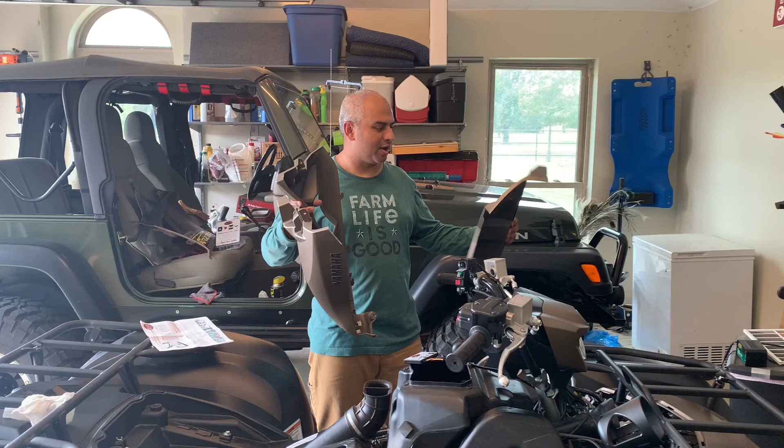This is about installing the EHS fuel tuner and AIS delete on a 2020 Grizzly XTR. I already removed all these things and have the tuner installed, but I just wanted to do a quick video on what I did.

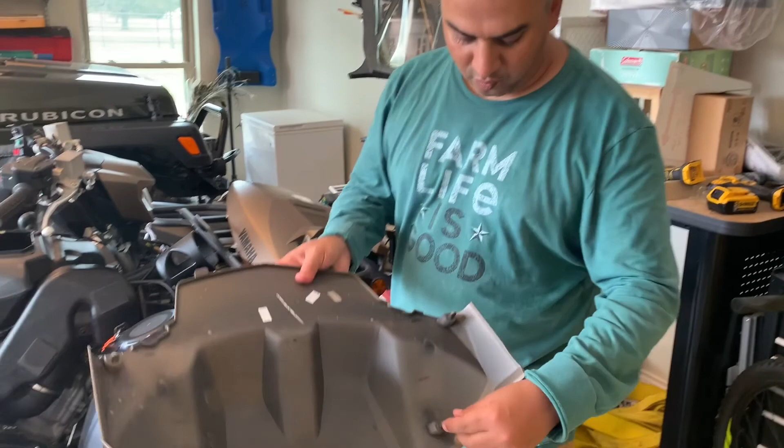Over here, this is the battery cover. This needs to come off first. Then this thing over the airbox and all that needs to come off too. It's just held with 4 tabs, so you put your fingers in it and pull it up, pop it up. Pretty easy stuff, don't have to overthink it.

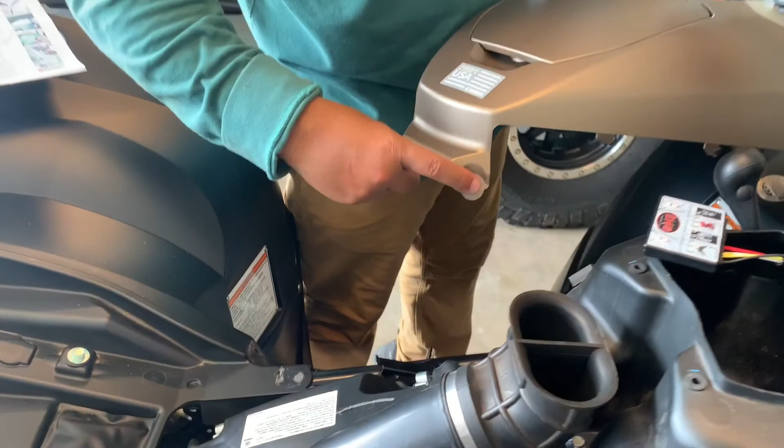This thing has 2 bolts over here that go right here, and 1 bolt right here. So you do that, then you have 2 things that pop in over here, that's over the side covers. They are just clips like this that you have to pop and take out.

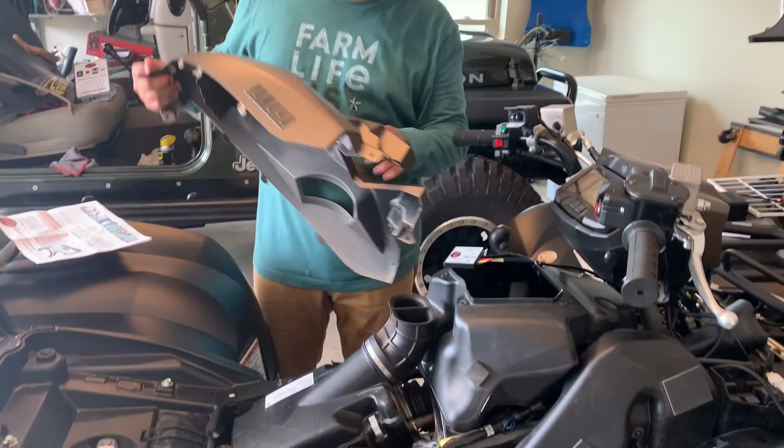This thing comes out, just leave it in park. I've heard videos that say move it to neutral, but not necessarily. Leave it in park and just wiggle this slowly out of here.

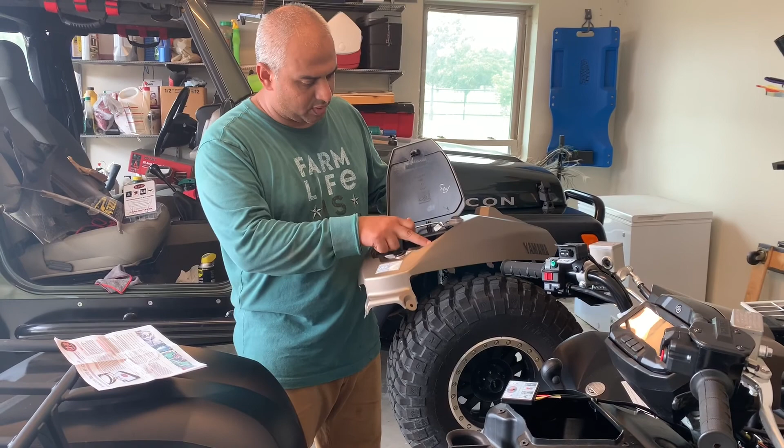When you do that, there are four screws over here. Remove those screws, they go over here in the storage box, and over here you see that nut. I lost one of these nuts, it fell off inside the engine, and it took me several hours to find it. So try not to drop that thing. Those are the 4 screws that you remove.

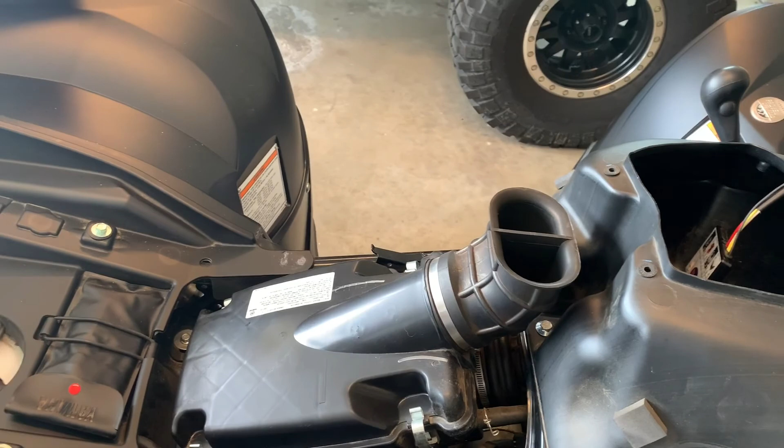You need to remove the airbox lid to get to the bolt over here to remove this thing out of the way. So I'm going to quickly show you how to remove that.

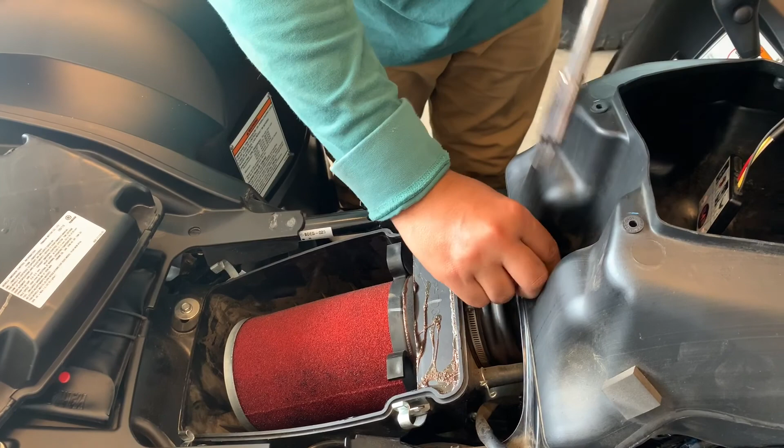Move that out of the way, move that, then just pull it gently and this thing comes off. The way it's connected, you get 2 connections over here. This was the original connection going into the injector.

So you take this connector, just disconnect the gray connector, pressing the tab right here and it comes off. Put the EHS tuner gray connector here, and the black connector that comes from the EHS tuner into the gray connector from the factory. That's how it's connected.

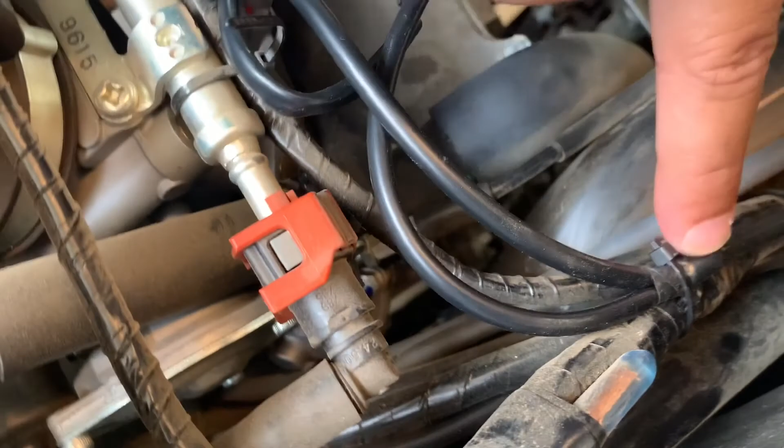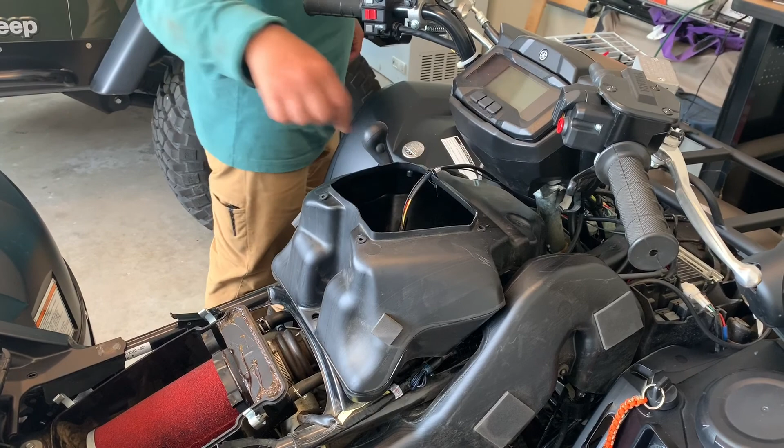You see that's how I routed the wires for the connector right there. That was kind of a little predicament for me as to how and where the wire goes without binding, so I wanted to show you guys that. Most of the videos, nobody shows how to route the wires. So the way I'm routing them, I don't know if it's perfect or not.

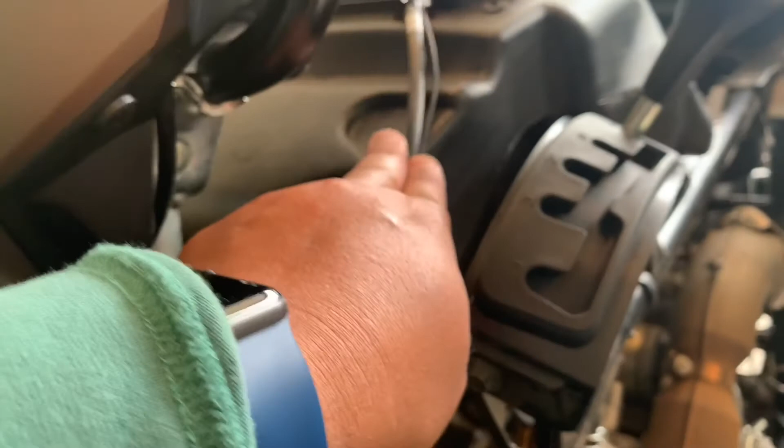Basically, I'm routing them over here away from the steering, protected from it so it doesn't bind. I left it loose, then just go around it, and the cover will sit on it. That's how I've wired my EHS tuner. Right now it's just hanging over here, and I'm going to stick it up on the lid once I put the lid on.

Put the bolt back on for the lid, for the storage box. This thing's hanging over here fairly loose so it doesn't bind anywhere. Put the lid back on, you need to take the lid off to reach this. Make sure the gasket is proper.

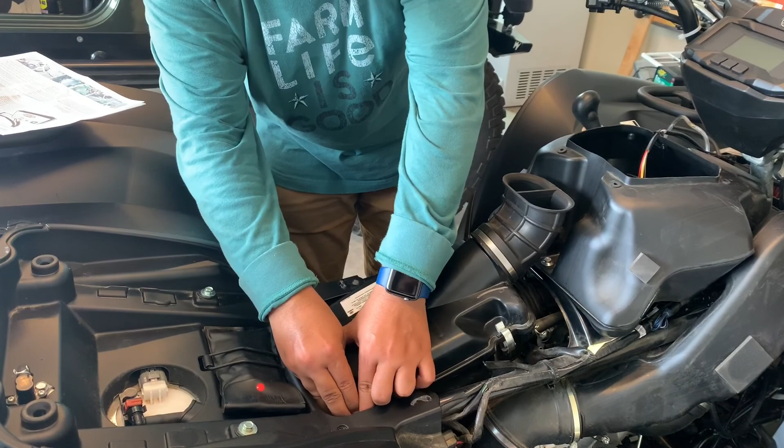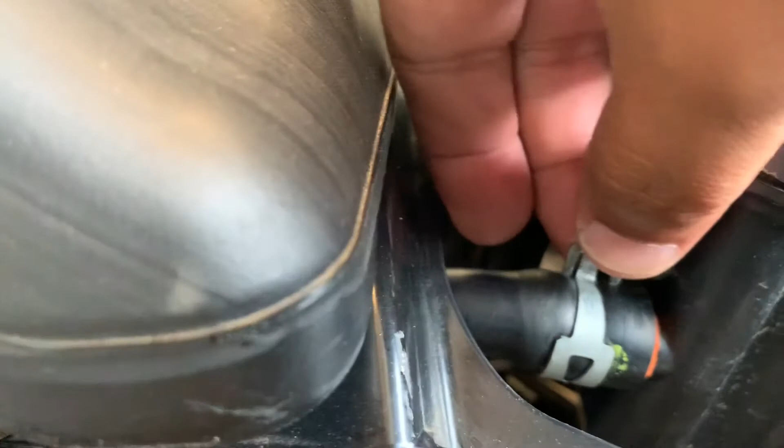This is the AIS delete, the air induction system. That's where it pulls air into the exhaust to burn off the remainder of fuel, any extra fuel for emission purposes. It makes the machine run a little hotter, and on some of the older machines it's had the popping issue, so most people on the forums say to block it off.

So I just put a bypass rubber blocker over here and put the hose on it. It was kind of hard to put on, so I used lots of WD-40, and you can see that this clamp is kind of maxed out. That clamp was hard to get on, but I didn't want to run to the store to get another clamp, so I somehow got it on and it's all good now. It's not going to budge, hopefully we never have to mess with it, so it's all good.

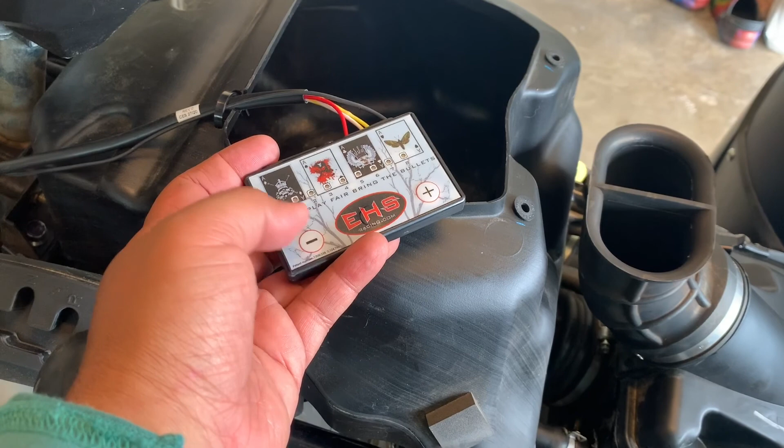So we're gonna start the machine and show you exactly how the programming works. The reason I did this EHS controller is not to get more power or anything like that, but to really make the machine run cooler. From the factory it comes pretty lean, and if you get on it, it basically gets the machine running pretty hot.

So everything I read suggests we need to add a little bit more fuel, and by adding more fuel it runs cooler. Let's see what it does. I don't know how much cooler it's going to run in Texas heat, but we'll try.

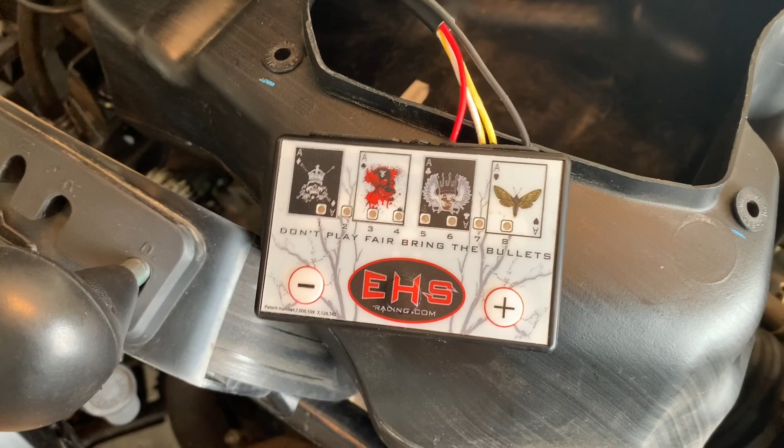Quick rundown on the EHS controller. So once we start this thing, it cycles like that. That just shows us it was installed properly.

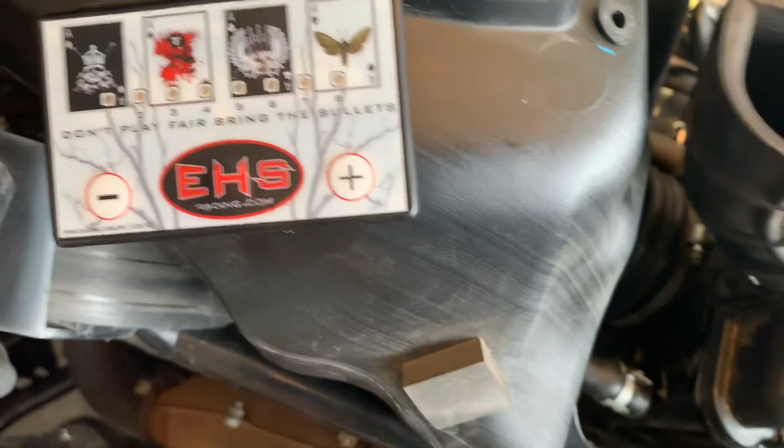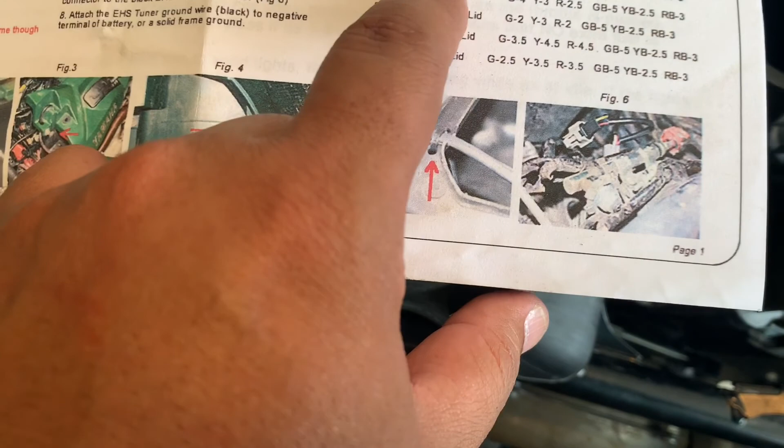And what it does is it gives you a set of instructions, and the instructions say we need to pick the setting which is best. Since we did not do any of the mods, the mod we need to do is the stock mod with or without tip. Well, we don't have a tip, so regardless we're going to do that mod right there.

This is the first one. So we have to make sure that green is 3.5, yellow is 2.5, red is 2, and then green-blue is 5, yellow-blue is 2.5, and red-blue is 3.

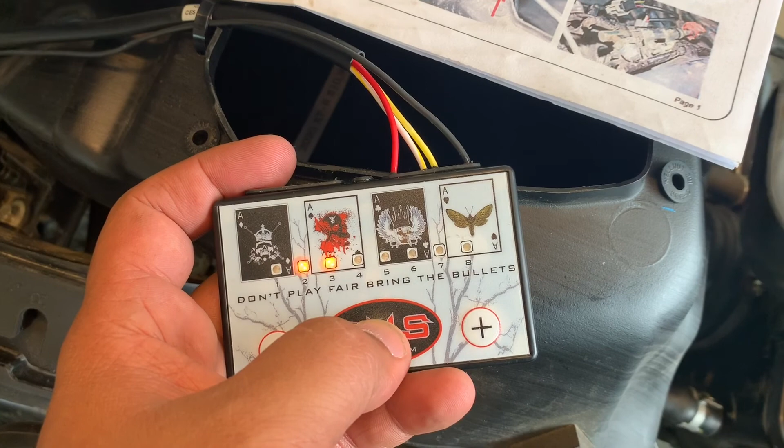So what does that mean? When we cycle over here, first button we press, this is the first one, 3 and 4 is blinking, that means it's 3.5, so we're good. Then the second one is yellow, so 2 and 3 is blinking, meaning it's 2.5. Then 3.5, 2.5, then we go to red, only 2 is blinking, meaning it's 2.

If we add more, it would go 2 and 3, meaning it's 2.5. That's how you add more. If it's blinking right there, press 1, then press the plus sign, it goes to 4. That's how the programmer basically works.

Got my sheet here. So again, green, yellow, red: 3.5, 2.5, 2. Then we go to green and blue.

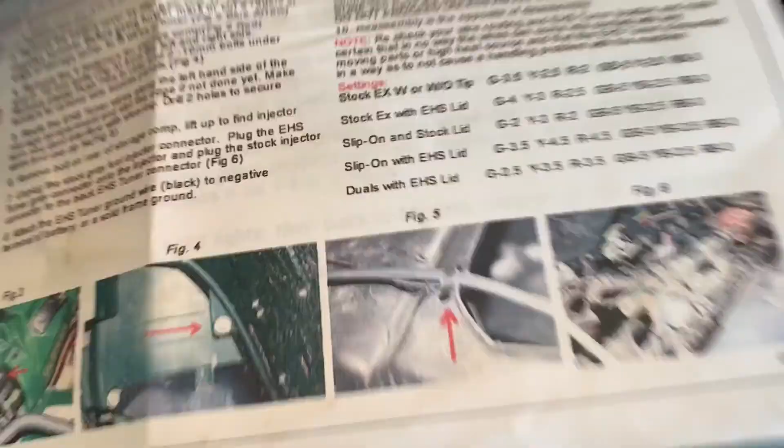You can see it's on 5. Then we go on, the yellow is 2.5, like it says in the setting right here. And then red -- we gotta go to red and blue, and red is 3. So that says red-blue is 3, that's what it means.

Hopefully that helps you understand how this instruction works. They're pretty straightforward, but it can be confusing when you watch videos and stuff like that. So that's the instructions I followed. I showed you how to.

So I showed you how I routed the wires right here. I took the ground wire and put it over here into the negative terminal over here. That's exactly how I've done the install. Hopefully no hiccups, no pinching, nothing, and that's it.

And then I'm gonna put this thing up and button it together. So that's the EJK fuel controller upgrade, the fuel controller install, and the AIS delete.

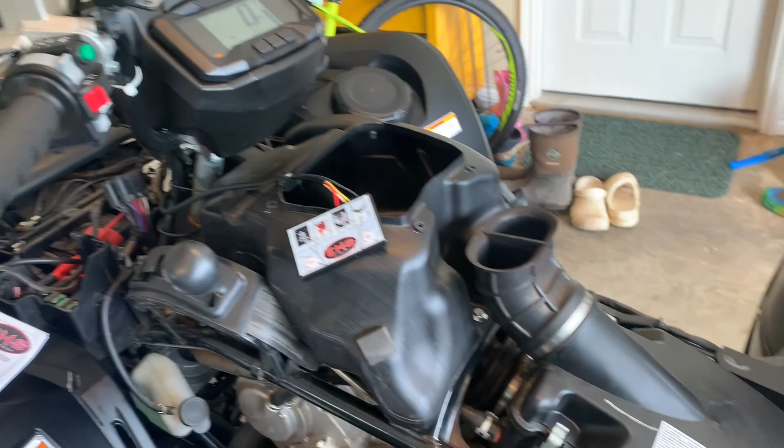Thanks for watching. Here's the quick overview of the instructions. These instructions are pretty good if you really take time to understand what they're trying to tell you. It looks intimidating at first, but it's really not.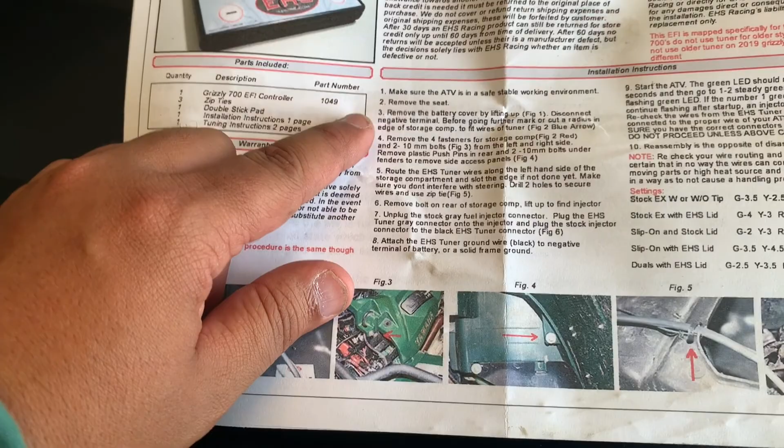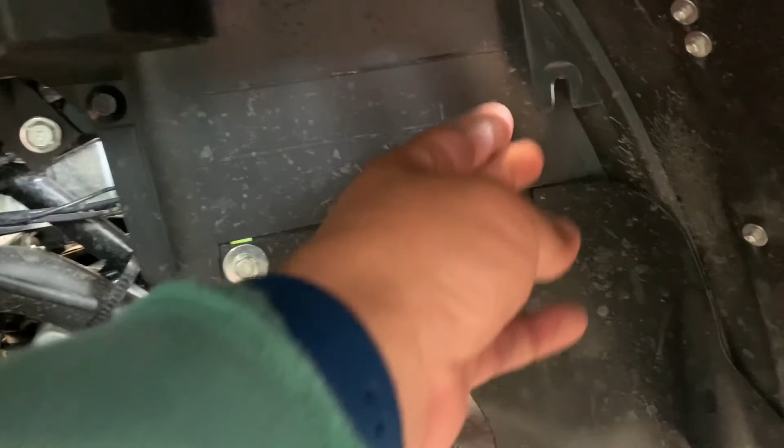If you know how to open your ATV, just take the plastics off, which on a Yamaha can be kind of interesting if you're coming from Honda or something like that. You need to take the battery cover off, take the cover off over here, the plastic off over here, and then to take the sides off there's a bolt over here you need to remove, then you just pull the cover over top.

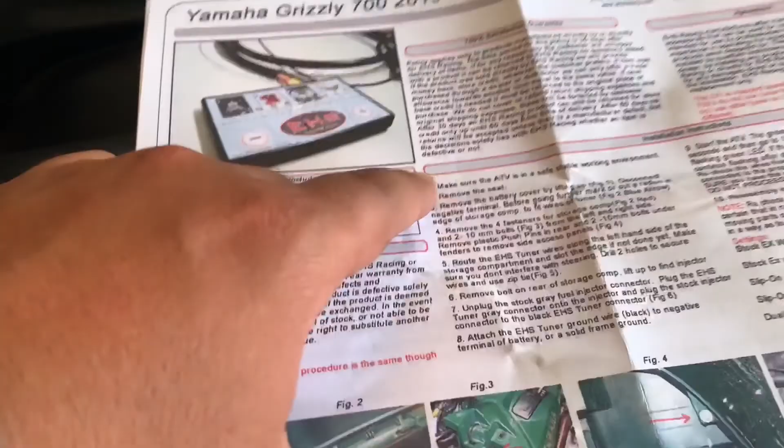So that's what the first few steps of the instructions are explaining. And then over here is what they're talking about, routing the wires and all that stuff. They go through that pretty quickly, but it's really not that difficult. If you're doing it for the first time, it might be intimidating, but just follow the instructions.

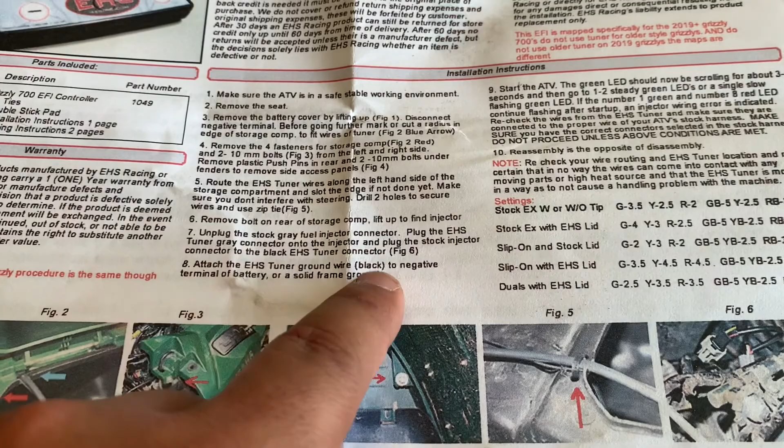It's pretty straightforward, I showed you before in the video. Then over here it shows you how it needs to blink in order to be ready for tuning. And then you basically come over here and figure out which one is your setting.

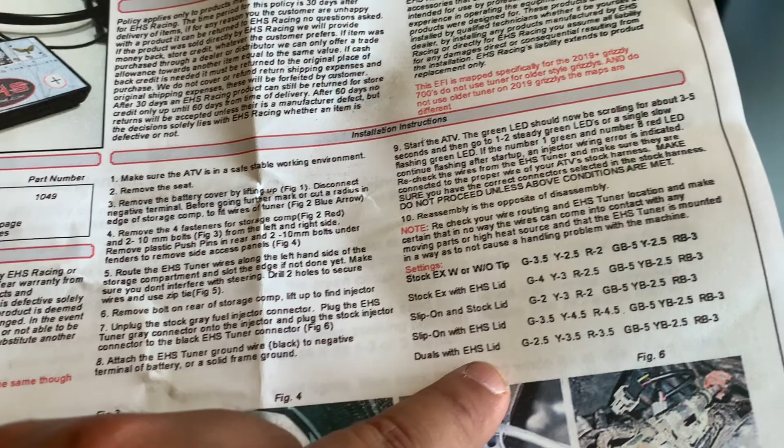I came very close to buying the duals, but when I actually watched EHS Racing's video, they showed that the maximum bang for your buck is with the slip-on, not necessarily the maximum gains.

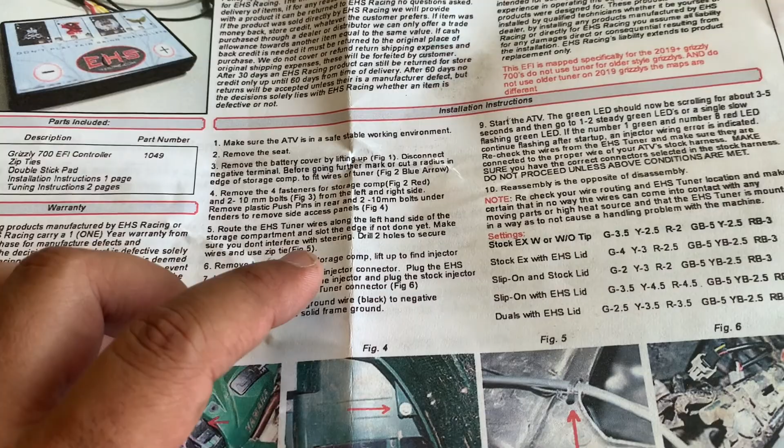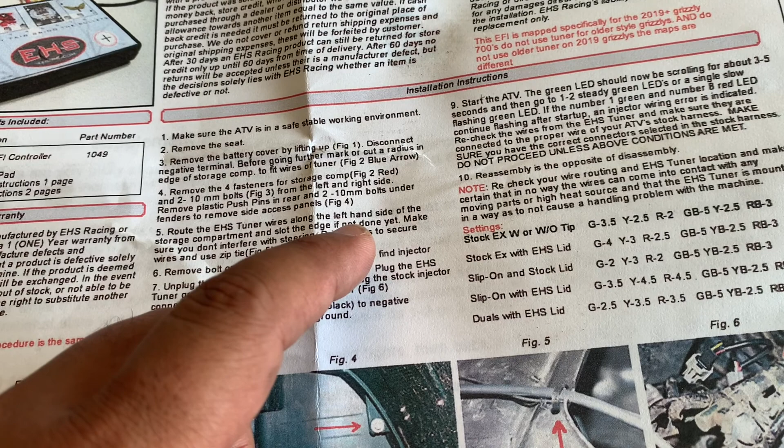Maybe in the future I'll do a slip-on exhaust on it, or the aftermarket tip. The slip-on is right here, and this is the stock one. So maybe in the future we'll probably do that, but it's really not necessary.

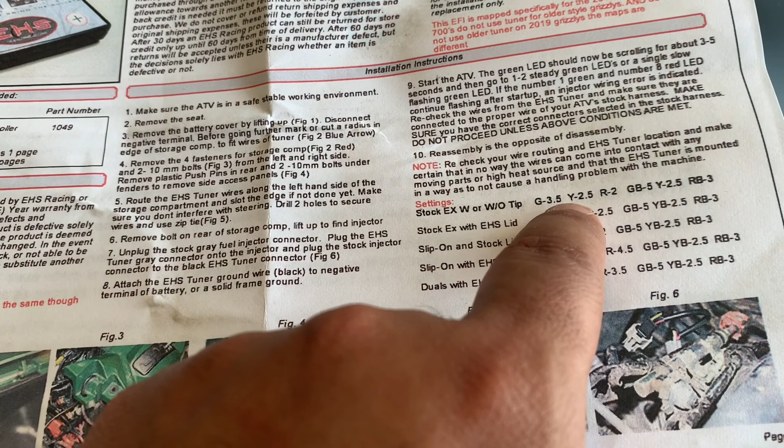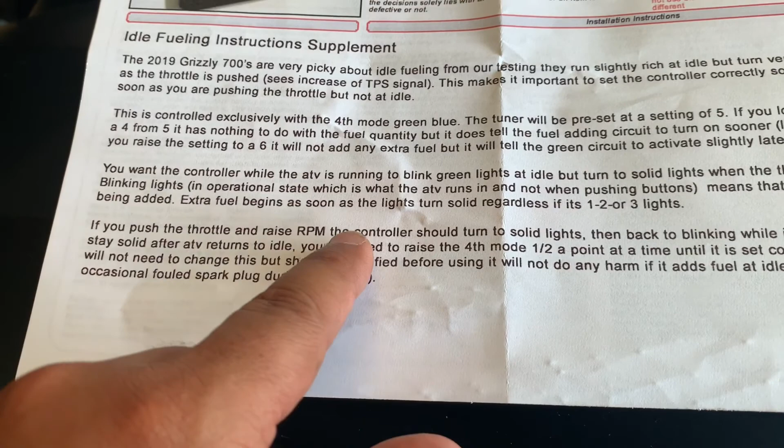Now these settings over here talk about how to add the fuel and what stages, and how quickly the fuel is added when you step on the gas. That's what's explained in these instructions, and what happens when you mess with it. If you really want to get technical, you just read through this stuff.

It's pretty detailed instructions, and I'm probably going to read through all of it, even though mine is already installed. So that's where we are.

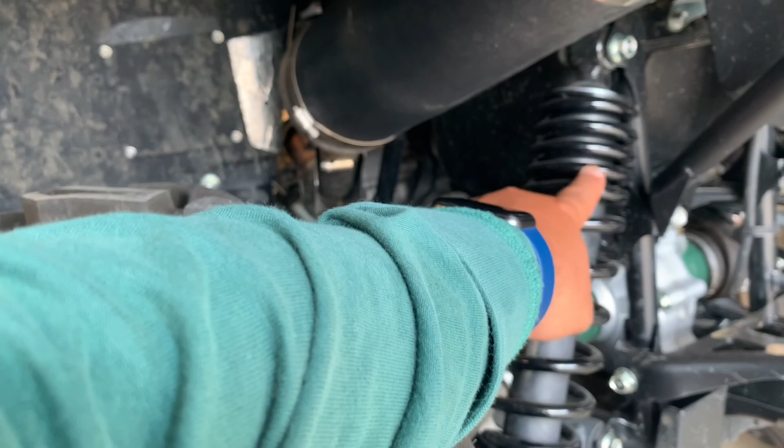Here's the reason I chose not to go with the duals: at some point I really want to upgrade my shocks to Elkas. Might be now, might not be now, might be two years from now, who knows. But the dual exhaust hangs over here and messes with the Elka shock reservoir. So that's the reason I chose not to go with it.

When I watched EHS Racing's video and the dyno graphs and all that stuff, I just didn't see the reason to spend over $900 with shipping and taxes just to get a very cool sound. It does make a very, very cool sound. So that's what my decision factor was.

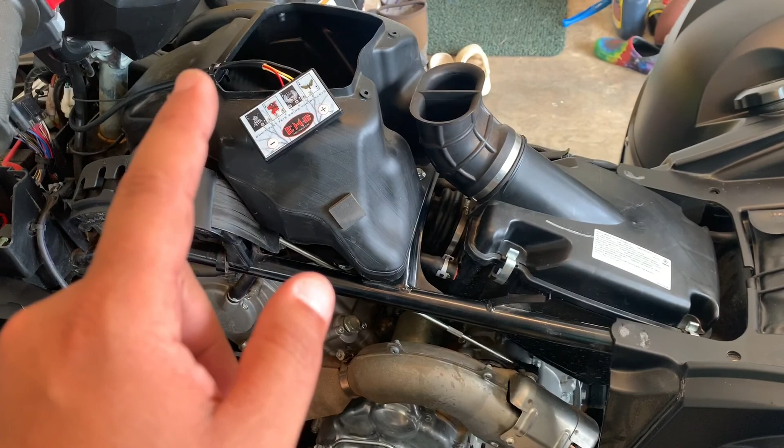My decision making on why to do just the controller, so hopefully the Grizzly runs cooler. I'll report back on that.

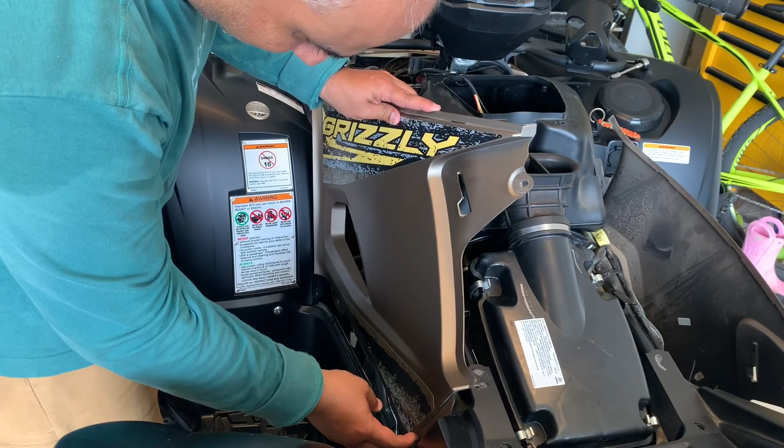This is only the first time I'm putting this on too, so I'm not a pro. I'm struggling just like somebody who will probably watch this video. People who don't want to watch this are probably people who already know how to put this thing on.

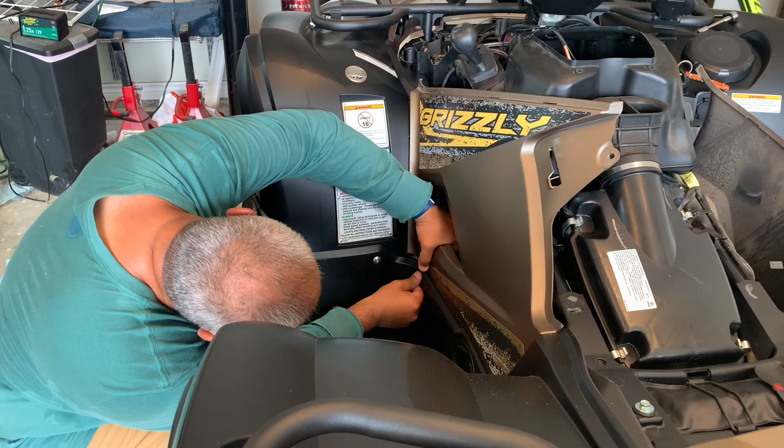Just line all these things up, nice and easy. There we go. Everything lined up.

It's hot in Texas. All right, time to put this thing on. It's not even 100 degrees today.

I remember this one was a pain to even put in or take out, so I kind of expected this is going to be a pain putting it in. Bending it just a little bit. Yay.

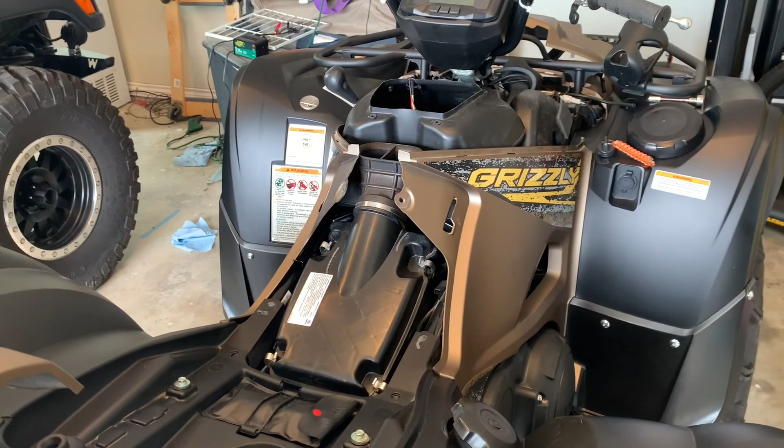The same bolts that we took out from here also goes over here. I need to show you this part. That's tricky.

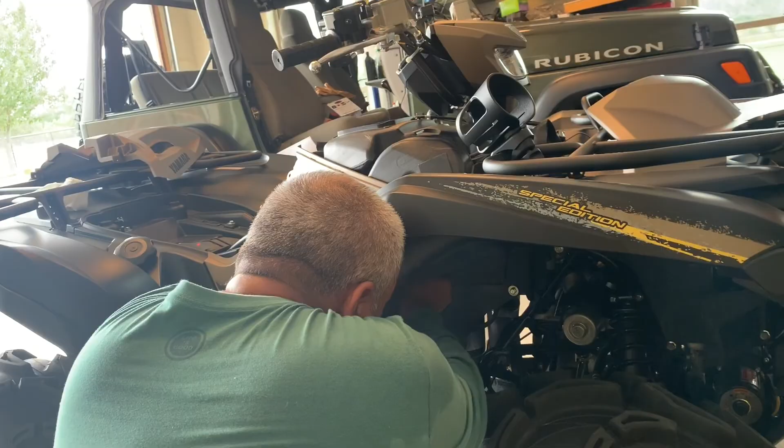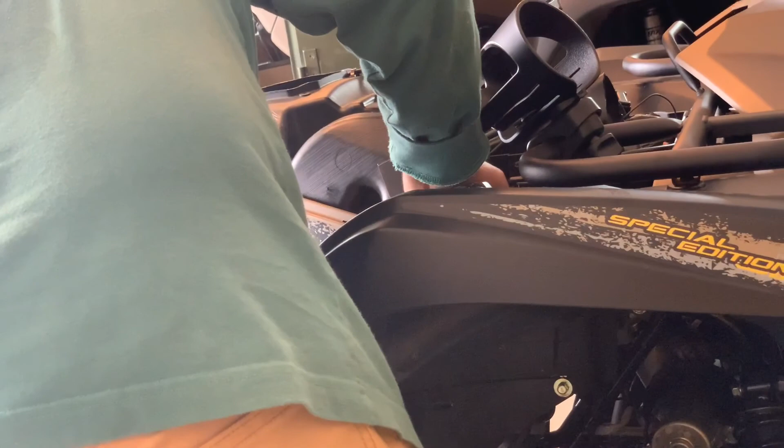Squeeze this thing in a little bit. It's like I'm binding somewhere, so something seems to not line up.

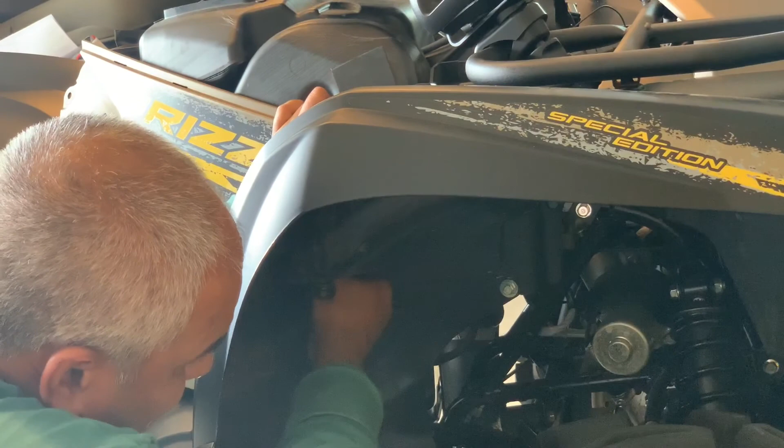Is it lined up now? Not sure. Well, I got it threaded on. I got this bolt threaded, so that means it's lined up. Good. Good enough.

I lost several hours finding one of these things because right now, for these little parts in Yamaha, no dealerships keep this in stock. So if I lost that, that means I cannot put everything on, and I had to wait for it to come.

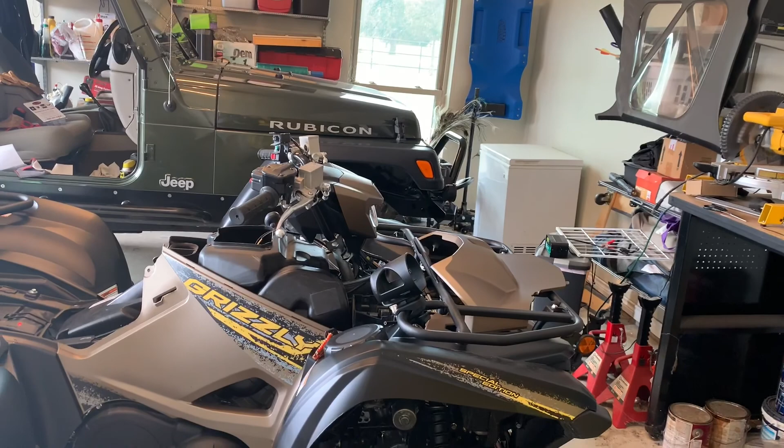So putting another one of those things on this side. This looks like it might be a little bit easier on this side. I have it lined up. Can't see it. Left side is so much easier than the right side.

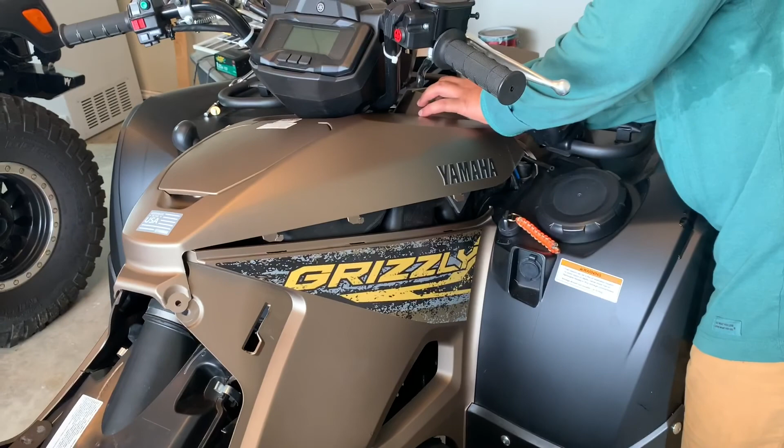I have no idea how this thing broke. I definitely didn't break this thing. I believe it came from the company like this. So that's interesting, I've been finding out a lot of tidbits about stuff. I was very gentle not to pull these things, so I know for sure I didn't break it.

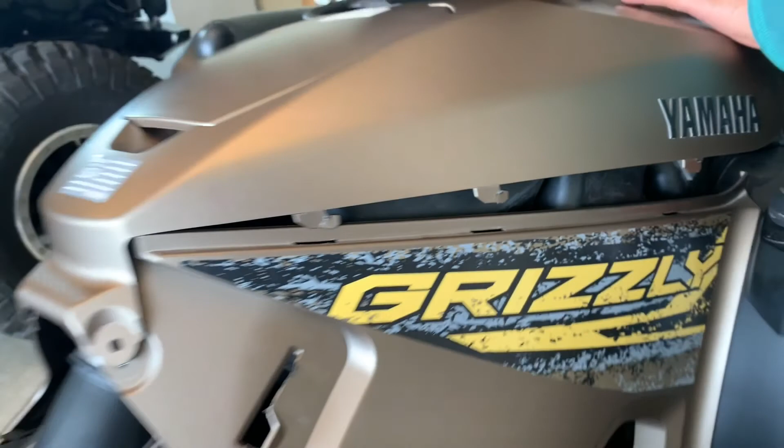Missing bolts, missing A-arm guards. It's been an interesting experience.

Getting everything lined up correctly over here. The hose is back in over here.

Woo, it's hot. I'm drenched.

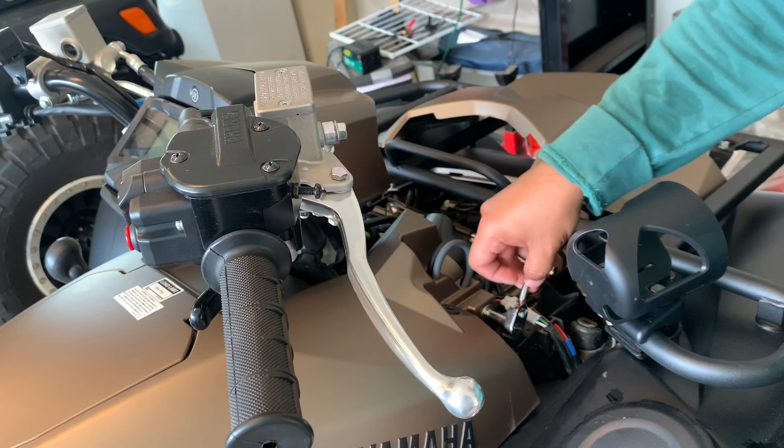Sweating all over my clean Grizzly. I'm gonna...

Put this little clip on. Uh-oh.

And finally, the cover. Bring it closer over here. So the cover goes into these little tabs here, like that. And then you just go in there, make sure the tabs I showed you guys earlier line up, and boom, push it in.

One lines up, the other one will line up. Just put it in. Okay, all nicely buttoned up. Let me get my hose out of the way. Okay, make sure I'm not forgetting anything.

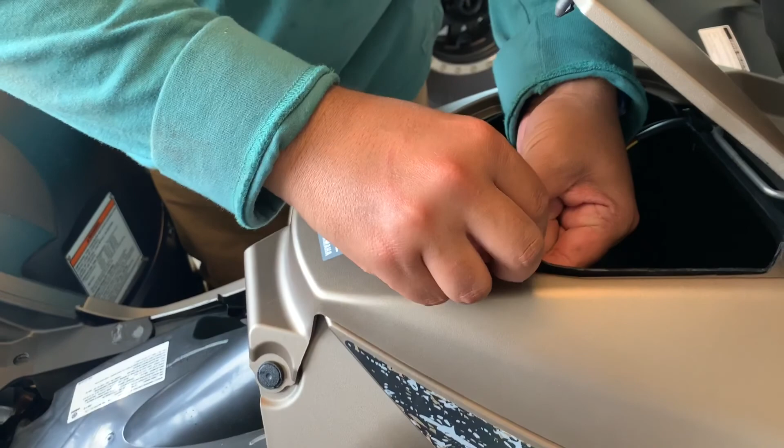Put these screws on. See how this could have come off because that thing was not in it properly. I'm gonna use a regular screwdriver.

It's not grabbing, so something interesting is going on. Let me try the other one.

Don't want to over tighten that thing. That one grabbed, so that was good. Let's try this one here.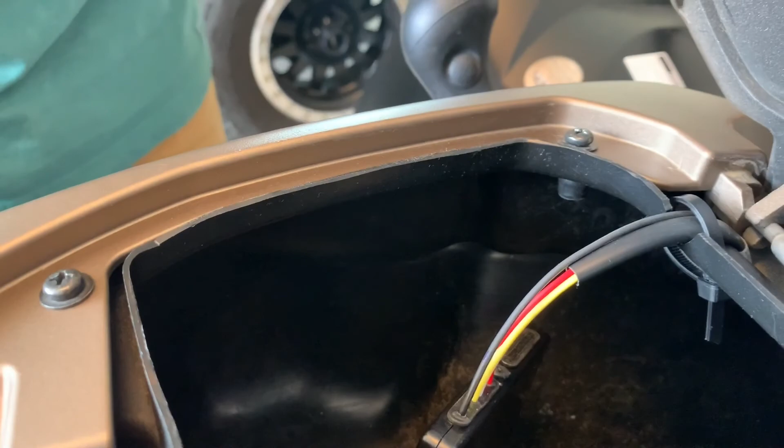Not grabbing either. Not sure what's going on.

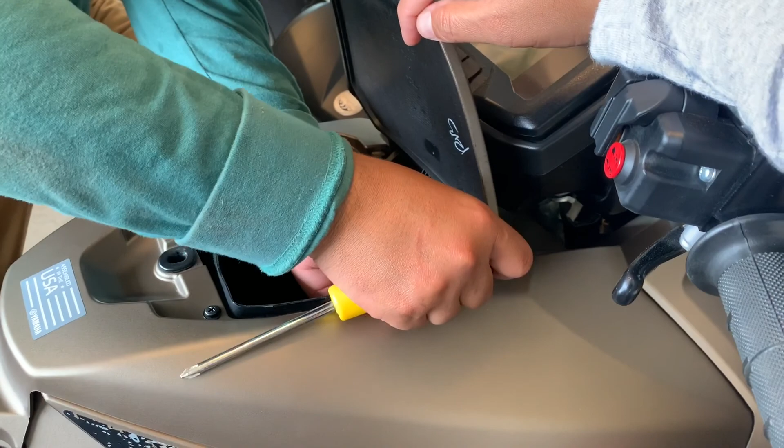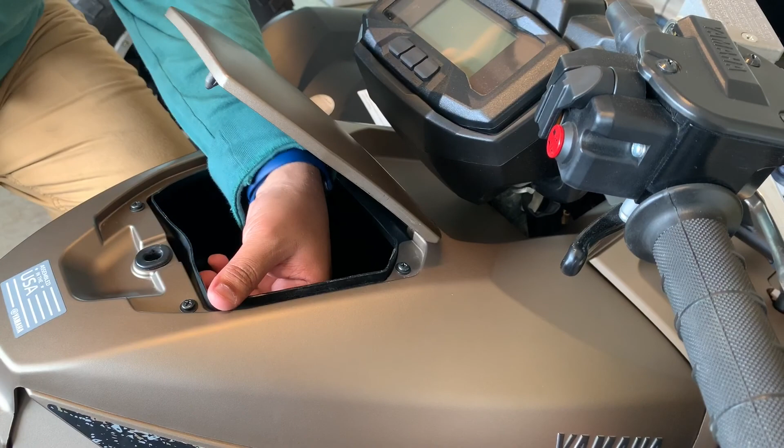That one grabbed. I'm thinking it's something to do with the way it was installed from the factory, that this did not grab, and because of that I dropped it in there somewhere.

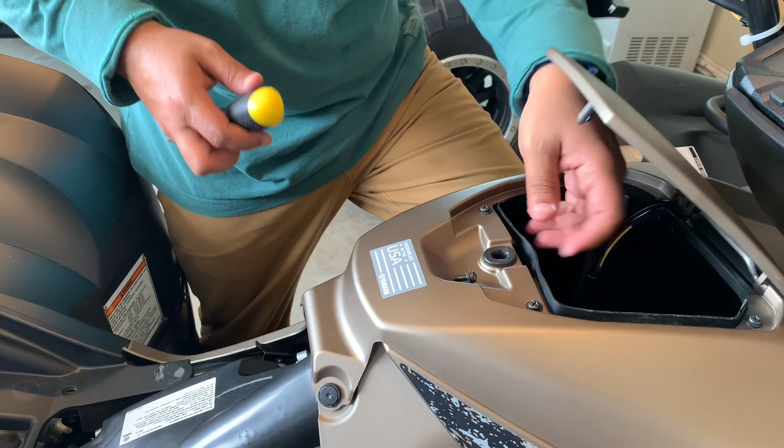So let's see if I can mess with this one. Not grabbing at all. I'll try the other one. I'm gonna try this one again.

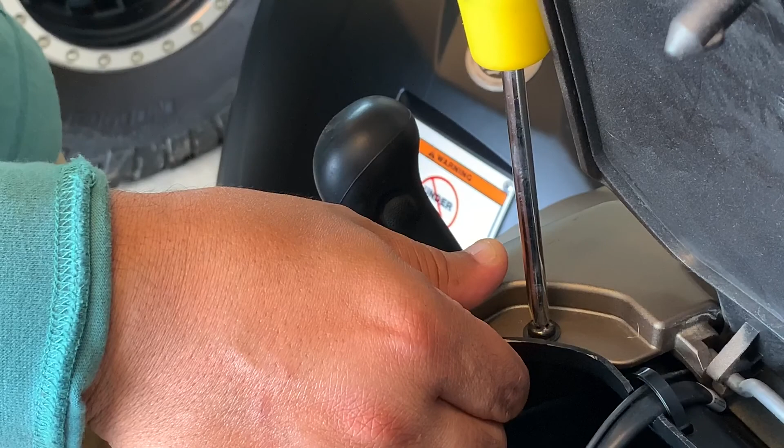That one grabbed. Need to not over tighten it. All right, let's see if we can figure this one out.

Okay, so it's grabbing, and now I'm gonna push it down and see. So it's like a little compression nut, kind of like the way nut-serts work, where it goes in and it grabs, and give that thing real quick.

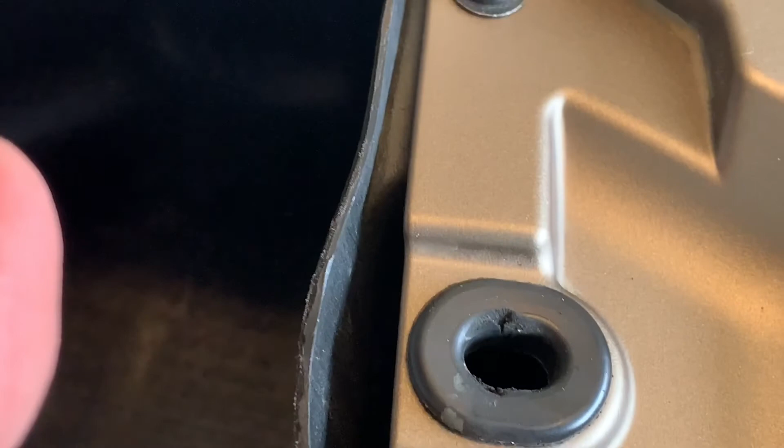So once it grabs, it bubbles up like that from being straight, then it flattens out like that. So this one on this side was not grabbing. It was a little work, but I got it to grab, and I'm threading it in right now.

Not applying much force, just turning it gently, and that should be it. So one thing I've noticed compared to my Kodiak, because this lid is painted, there's not enough room over here, so when you close it, it kind of stays bubbled up like that. So interesting.

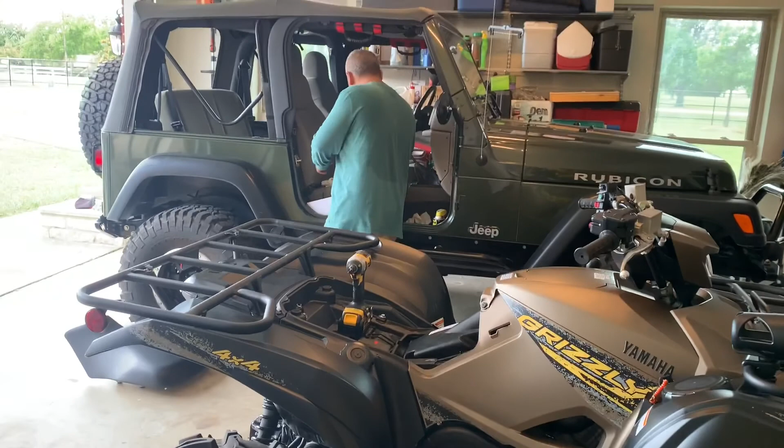All right, so that should be it. And the seat... this is a little thing that EHS provides to hold this controller, giving you an option to stick it up over here so it's not dangling inside.

So I'm gonna put that on. First I'm gonna... I don't think it matters which one goes on which side, so I'm just gonna stick this one in. I'm not gonna worry about cleaning it with alcohol and all that stuff.

It falls. There is where I'm gonna put it. Try and make sure that the wires don't stretch too much.

That's how you're gonna use it. Turn it, use it, put it back on. That's it.

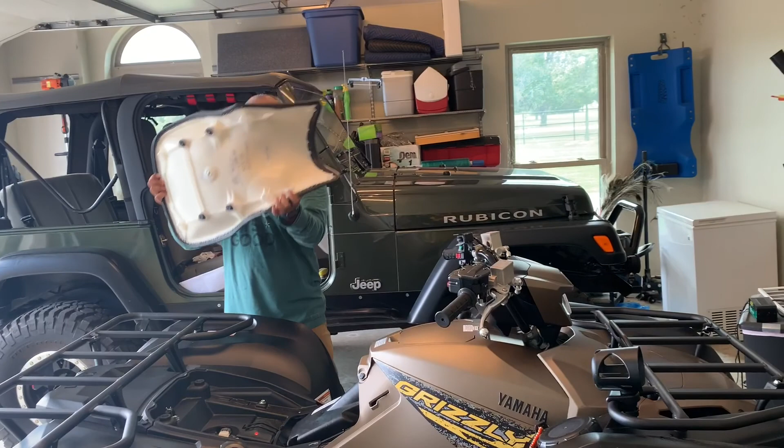My newly done seat - if I don't drop it again. It seems like I cannot grab the seat, keep dropping it. Okay, I think that should do it.

Okay, let's fire it up and take it for a little spin, if you can follow me around. One thing I noticed when I redid this seat after it got torn, is that this is less cushiony with that harder, or not hard, but thicker vinyl.